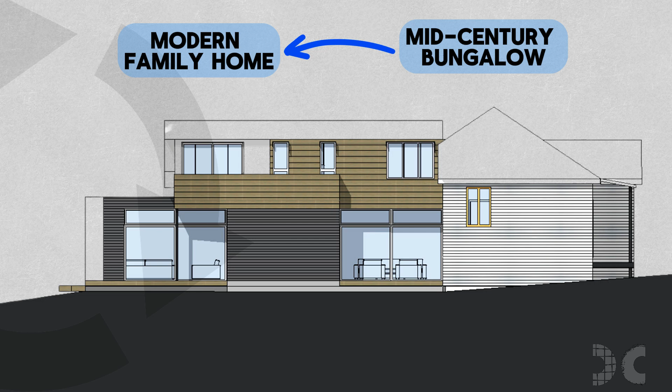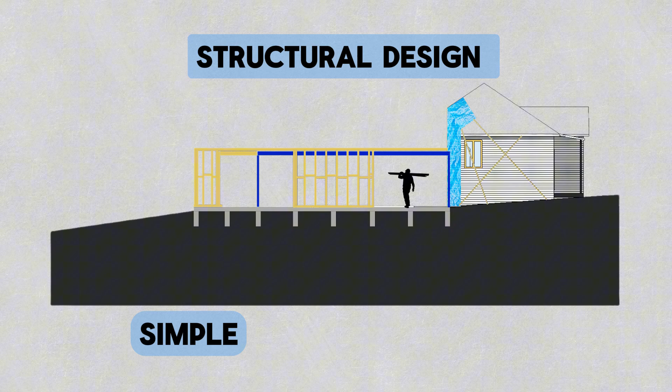In this video, I'll demonstrate how a mid-century bungalow is transformed into a modern family home, and I'll show you how this home meets a combination of financial, quality and environmental objectives. We'll first consider what size home the owner can afford with a budget of $600,000 using a simple square metre rate cost estimate. Next, I'll critique the structural design and emphasise the importance of adopting simple structural systems constructed with speed, underpinning the success of any project.

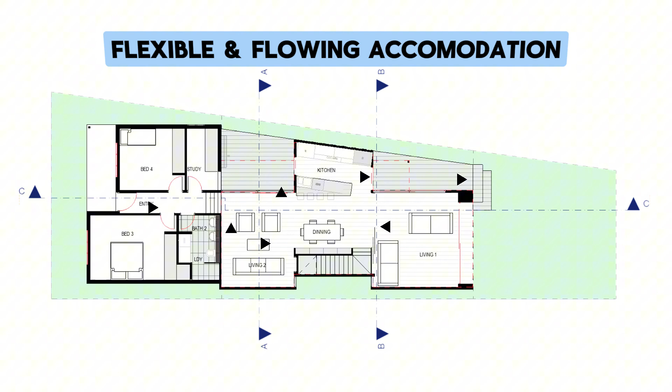The next objective is to ensure the building's shape and orientation is arranged to harness heat in the winter, shelter from it during the summer, and coupled with this, airtight construction that boosts the overall thermal performance and reduces gas and electricity bills. I'll conclude by illustrating how the design achieves a strong connection with landscape, flexible and flowing accommodation, as well as spaces of comfort and quality.

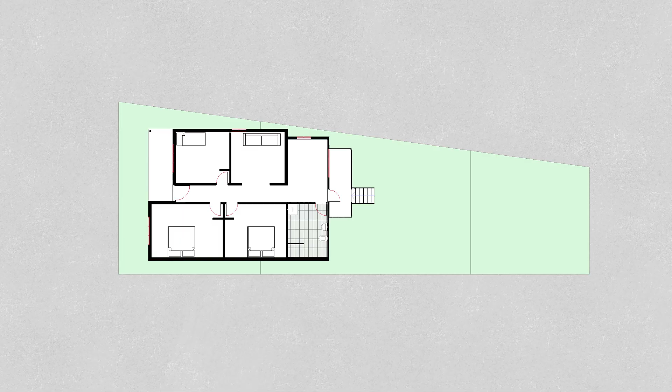Let's discuss the square metre rate, influenced by many factors. First, the fact that this is an addition as opposed to a new build. We'll need to account for making good the existing building, renewing existing services, and the time required to carefully deconstruct the rear portion of the site to allow the new portion to tie into it. To account for these works, I've applied the same rate of $3,000 a square metre to the portion of the house that is retained. This is erring on the conservative side.

Second, are the structural systems. To achieve good value for money, the structure needs to be simple and fast to construct, so your average builder can confidently procure and construct, attracting as little contingency as possible for time and cost. In this example, the engineer has specified a slab on ground founded on concrete piers. The shape of the slab is simple and absent from deep folds and set downs that require more formwork and reinforcement and potentially multiple concrete pours.

A compact footprint is also key, minimising the expense of civil and structural trades. Simple homes usually require one pour for the piers, then a second pour for the slab a week or so later, each typically needing a pump and boom and possibly traffic management, all adding to the overall costs.

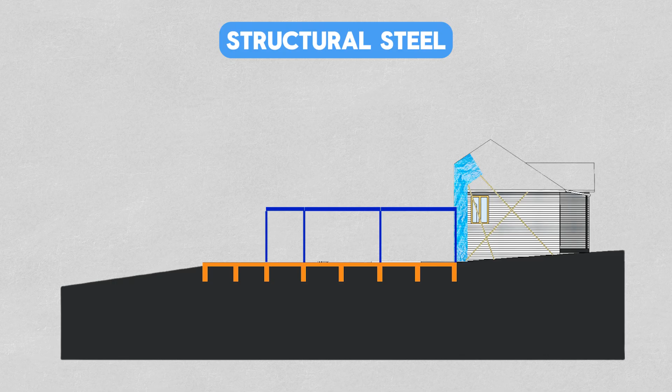Now next is the structural steel, comprising several columns and beams. This is a manageable amount of steel in a relatively simple setup that is typically installed using a crane. With careful forward planning, a good builder will be ready to load the job site with a heap of other materials, maximising the use of crane, reducing labour costs and generally pushing the program along.

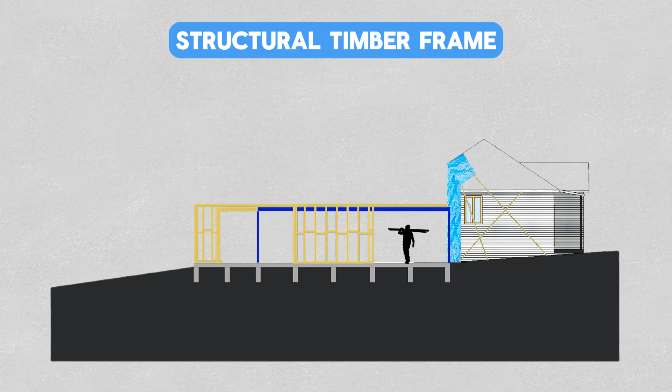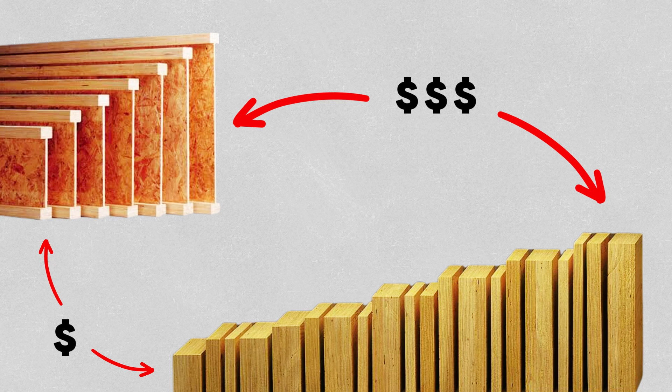Okay, so after the steel, the structural timber frame is built. There are load-bearing walls from studs, the upper level floor from joists and the roof from purlins. Floor spans need to be carefully considered, as the costs for joists and purlins increase disproportionately as the span increases. Limiting spans to 5 or so metres allows for smaller section sizes that are quick to assemble with fewer carpenters. Larger spans require large sections that are deeper, heavier and harder to install. For this home, we've adopted wall heights of 2700 at ground and 2400 at level 1.

These dimensions align with standardised sheet widths supplied at 1200 and 1350 and are typically installed horizontally, one above the other, avoiding offcuts and saving on skip fees that amount to thousands of dollars. With these key spatial dimensions considered, we can start resolving the building's shape and orientation to maximise heat gain in winter and shelter in summer.

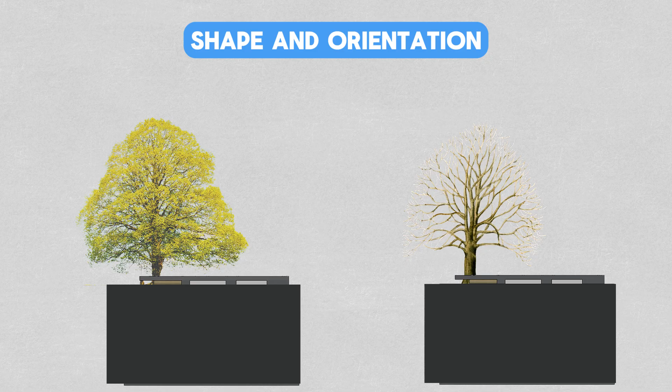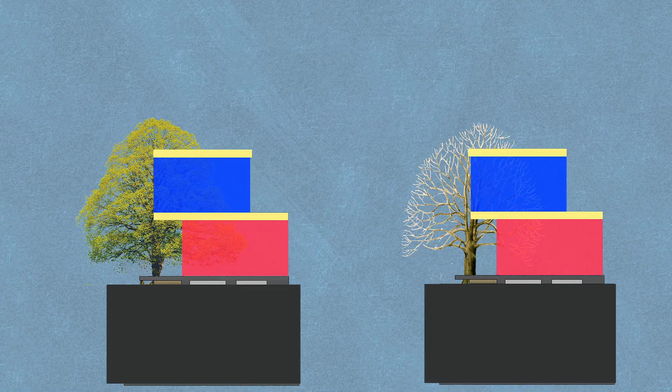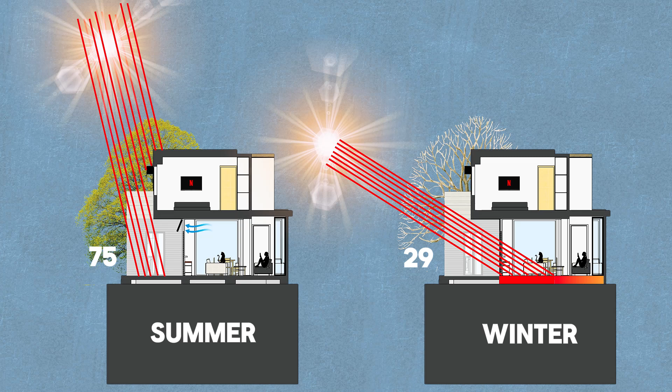Let's take a cross-section through the building and examine the sun's altitude angle on the two most extreme days of the year, being the 22nd of December and the 21st of June. At 12 noon, the angle reaches 75 degrees in summer and 29 degrees in winter. In summer, the level 1 mass comfortably blocks the sun. In winter, several metres of sun enters the house and heats the concrete slab. The radiation from the sun will be absorbed in the concrete's mass, then emitted as heat during the night, saving hundreds of dollars in heating costs in a year.

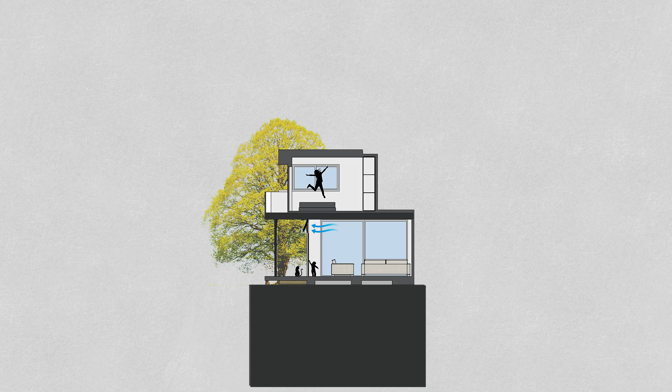Another component to this heating strategy is to specify a glazed unit along the full width and the height of the northern wall, as well as using carefully positioned deciduous trees. Now, heat gain to the upper level is controlled using eaves that are typically 450 deep or 600 deep, half the width of a standard sheet of fibre cement. If there are eaves, it will be blocked as it sweeps through its azimuth angle during the day. These are basic shading measures that are a statutory requirement throughout Australia.

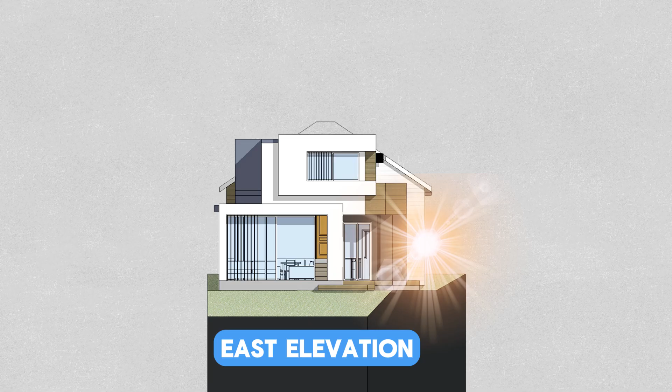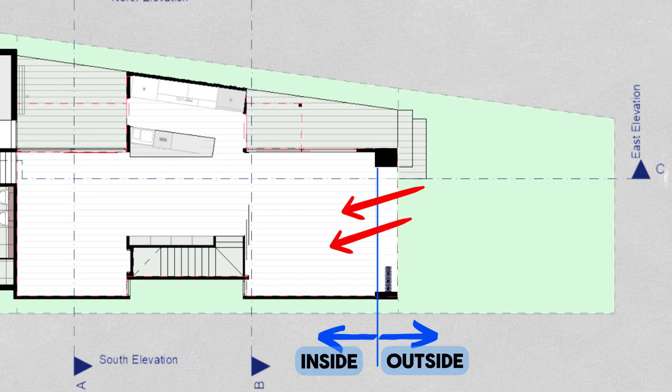Let's now consider the eastern elevation, where the sun's altitude angle gets to be as high as 75 degrees in the summer months. The sun's heat penetrates all morning, effectively baking the interior of the house if not properly protected. In this scenario, operable vertical louvers have been specified that block the sun's UV rays while allowing sunlight to enter. It's important these louvers are vertical and located on the outside of the building, so radiant heat is kept outside. In the winter months or during the evenings, the louvers are retracted, allowing heat and light in and restoring views to the garden. Now, the same design response is applicable to the western elevations.

And in addition to louvers, low E glass could be specified to further reduce radiant heat transfer, having a very thin coating applied to one side that reduces the transfer of heat or cold through the glass, acting as an invisible insulation barrier. Now on the topic of thermal performance. Probably the single most important factor after building orientation is the airtightness of a building. Airtight buildings have much lower space heating and cooling requirements and allow air movement to be controlled depending on the season.

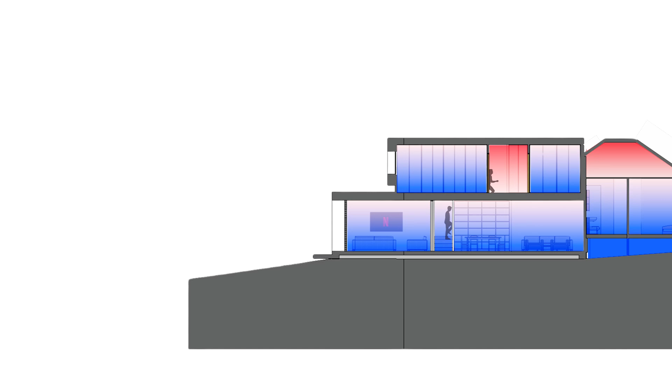Let's examine the house in the longitudinal section and visualise how thermal stratification occurs naturally during the summer months. In this example, vents are positioned in the roof and upper level, allowing the hottest air to trickle out, while another vent is located at the lower level, allowing cool air from under the house, that's the original part of the house, to be drawn in. This is passive cooling without the need for electric fans to draw or push air. The success of this system depends on how airtight the building is and how well other parts of the building are insulated. If construction is executed well, the occupant could remain comfortable well into the afternoon on a summer's day before switching on air conditioning.

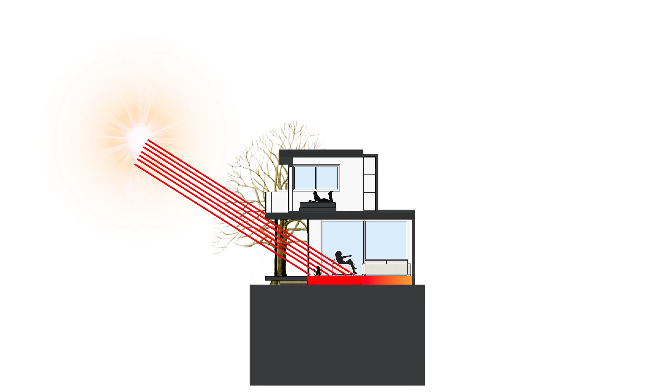During the winter months, those vents would be shut and the heating strategy would involve harnessing energy from the sun, as we demonstrated earlier, and storing this heat in the thermal mass, slowly emitted as radiant heat into the air inside the house. An airtight building will help contain this heat inside for longer, allowing the heat generated by bodies and electrical equipment also.

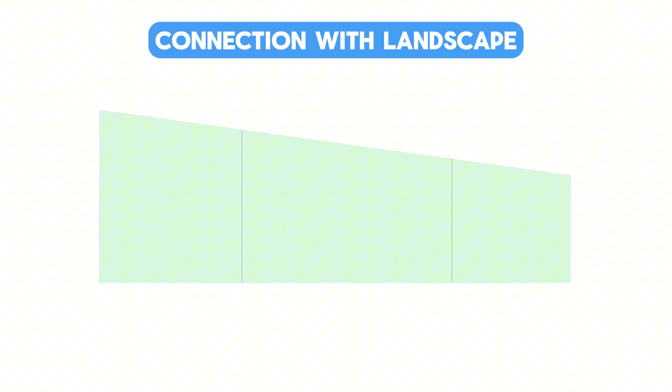Let's now explore how the design creates a strong connection with landscape. Essentially, the shape of the floor plan has been articulated, combined with full height and full width operable glazing, so the occupants can visually and physically access and connect with the landscape from all key living spaces. If you look closely, two slender windows have been located on the southern elevation, which will allow indirect light to enter, but also creating further connection with the sky. This window is operable, promoting cross ventilation and contributing to better indoor air quality. Ceiling fans are another obvious means to promote airflow.

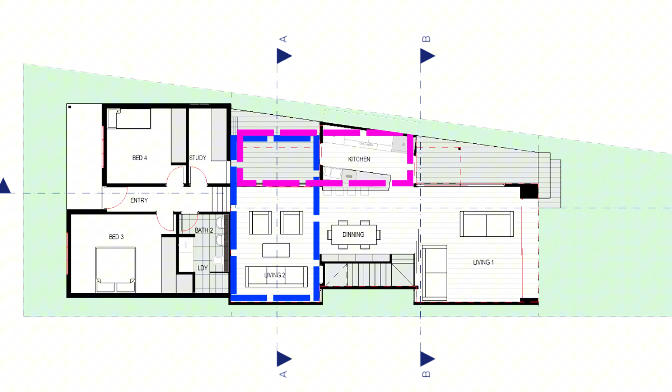Let's now examine the spatial arrangements in some more detail. One important observation is the direct adjacencies between the kitchen, dining, living and the courtyards. Depending on the occupants and the occasion, different combinations of spaces have the capacity to work together. For example, the adjoining courts becoming an extension of the kitchen or the living room, allowing the dimensions of the internal rooms to be a little smaller without compromising the feeling of space and comfort. To achieve this, material selections and detailing would need to be carefully considered to improve the flow between the internal and external space, helping connect and unify the two.

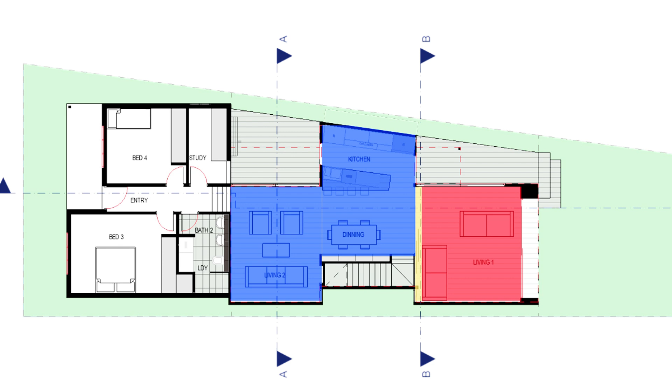Another combination is the kitchen and dining space during meal times, or the living dining space where occupants may be interacting. Another important feature on this floor plan is the operable sliding door separating the living and dining, effectively creating two distinct zones that are visually and acoustically separated, providing further flexibility. So that brings us to the end of this video, folks.